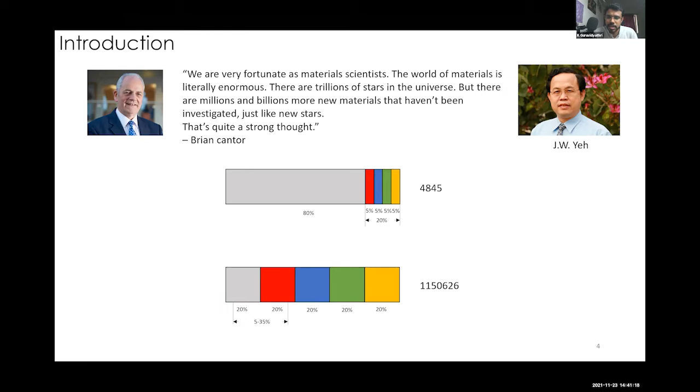So there are so many elements which are added in this equiatomic kind of ratio, which results in high entropy alloys. And the number is so high that there is a lot of excitement in the field. So people are exploring left and right all these possible alloys.

Anything related to materials, any subject related to materials, should be mapped into this materials tetrahedron, I would say. If you come across any lecture or subject related to materials, see where it lies in this materials tetrahedron. Most of you would have seen this. It basically tells us that processing is related to structure, which is related to properties, which is related to performance. And of course, all these are interconnected.

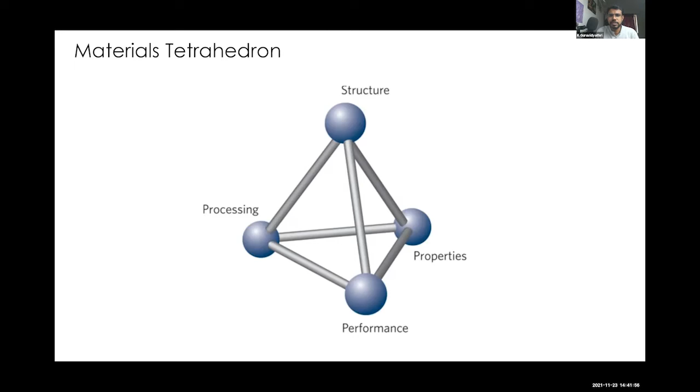An easier way to visualize this is a linearized materials tetrahedron, I would say. So I usually present this rather than the previous one. So we'll start from the left, processing.

So there is another entirely new kind of activity, which is choosing a composition, and only then we go for processing. Since the materials tetrahedron generally starts with processing, I would put the composition selection in the first part itself. So processing starts with choosing a composition, and then you go for any manufacturing process: casting, forming, heat treatment, welding, and so on. What all these are going to result in is a certain microstructure for the material.

And in microstructure, there are things like phases, grains, morphology of phases, etc. We will see about that with pictures so that you will have some more concrete pictorial imagination to assist your understanding. Then this microstructure is the one which controls the properties. Most mechanical engineers bother about composition, manufacturing process, and properties. The in-between thing, which is the microstructure, is where metallurgists come into the picture.

So understanding the microstructure, how it relates to the previous step, the processing step, and to the property step. You tailor the microstructure, you are able to tailor the properties. That's the power of understanding microstructures. There are certain things which we will talk about in detail: first, choosing composition in the processing part; in the microstructure part, the phases; in the properties part, the first four properties: strength, hardness, ductility, toughness. And then these properties enable the application.

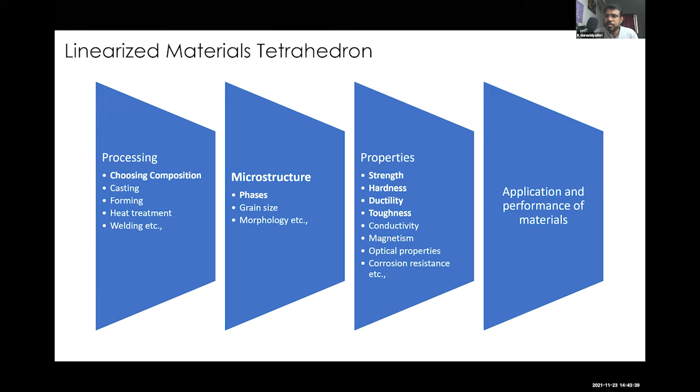So the contents of the talk are going to be like this. I will fit whatever I'm going to talk about into this materials tetrahedron. First we'll talk about composition. As I showed in the first slide itself, it's basically trying to find out which composition of high entropy alloy is good. That is the hunt for better and better high entropy alloys based on composition selection. So that is the most critical part.

Then phases. In the microstructure, we will talk about phases, especially two phases: one is solid solution, the other one is intermetallics. And in the properties, we will talk about two properties: strength and ductility. Most of you know that these two are opposite to each other. And for strength, we are talking about yield strength as well as ultimate tensile strength.

Mechanical engineers, when you study strength of materials, mostly you stick to the elastic limit, and you talk more about moduli, bending moments, all those things, where you talk about structures but don't really talk about stresses beyond the yield point. But the concern, when it comes to materials design, is strength and ductility in terms of plasticity. That plasticity is opposite to strength. If strength is high, ductility is low. This kind of thumb rule you might have heard.

So the holy grail of most structural materials or mechanical behavior related materials development studies is this: how to increase strength without compromising ductility, or how to increase ductility without compromising strength. So we will also try to see how this hunt gave rise to high entropy alloys.

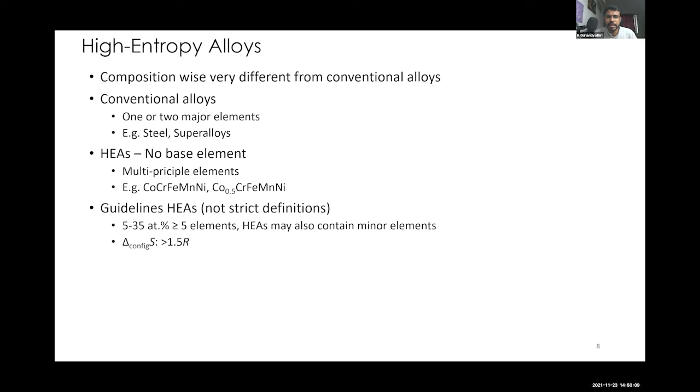And then this delta S configuration. This is one thermodynamic property; we will talk about that in detail. That property value should be more than 1.5 R. This is another definition, kind of, for high entropy alloys. Then generally speaking, these are equiatomic or near equiatomic alloys: all elements are equal in amounts, basically. And these are concentrated. I said the minimum is 5%. That means it's not a dilute solution; all the elements are in quite concentrated amounts.

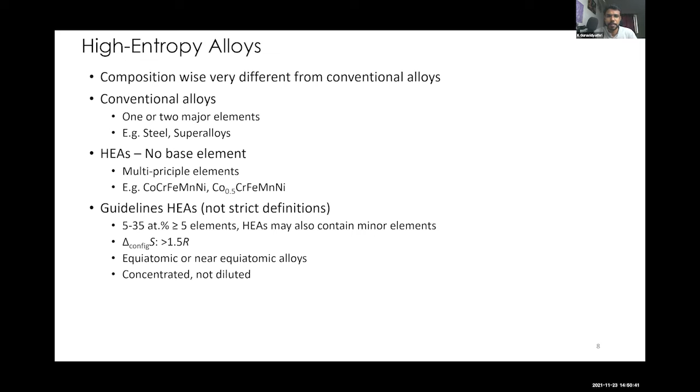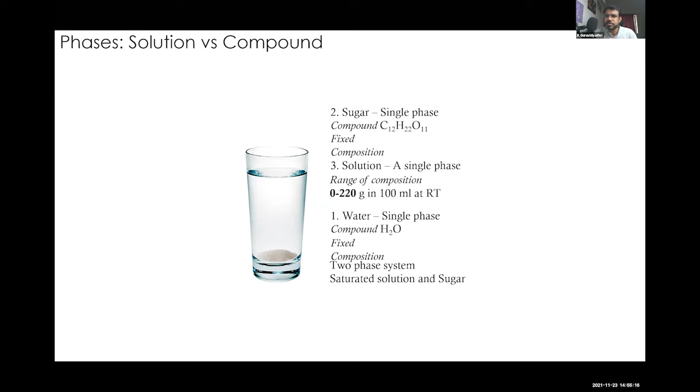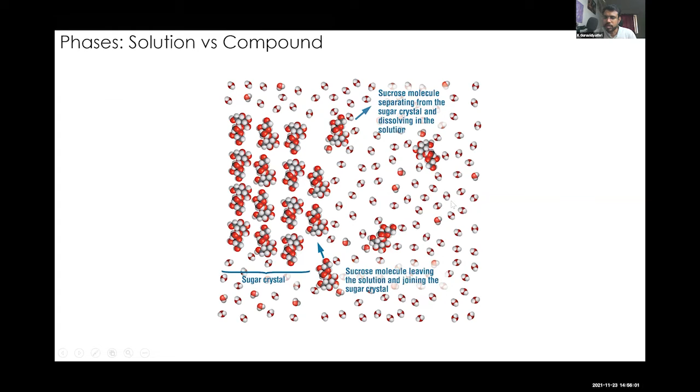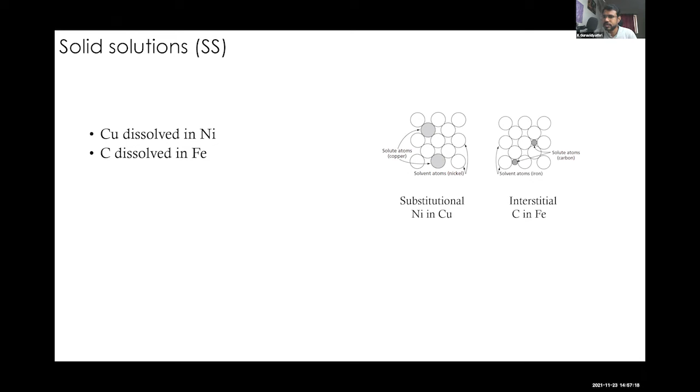Look at this one. So here solvent atoms are iron, these white atoms, and solute atoms are these black ones, which are carbon. Okay, so they are sitting in the gaps between the iron atoms, so they don't really replace the iron atom and sit. So this is called as carbon dissolved in iron, an interstitial solid solution. Okay, so it's another difference from substitutional. Okay, so here individual solute atoms sit among the solvent atoms. So this is also atomic level dissolution. In the previous case, I said the sugar molecule remains as sugar molecule inside the water solution. But here it is individual atoms of copper and nickel. Okay.

So please wait for a moment. I have to connect to power.

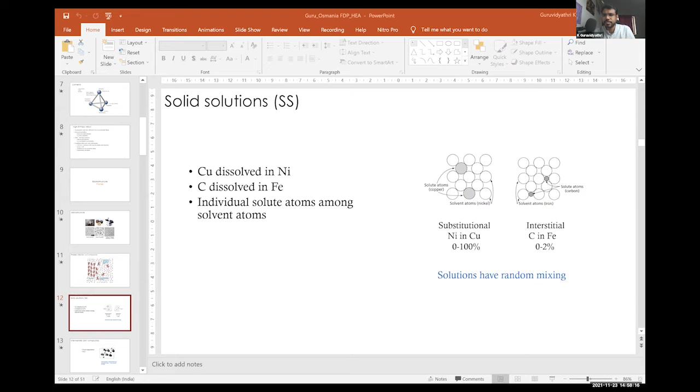Okay. So about solid solutions, we have just seen. So this is the range 0 to 100% of copper can dissolve in nickel, which means when you go to 100%, it is more like nickel is dissolved in copper. So the entire range of solubility is possible in the nickel-copper system. And in case of carbon in iron, it is up to 2%.

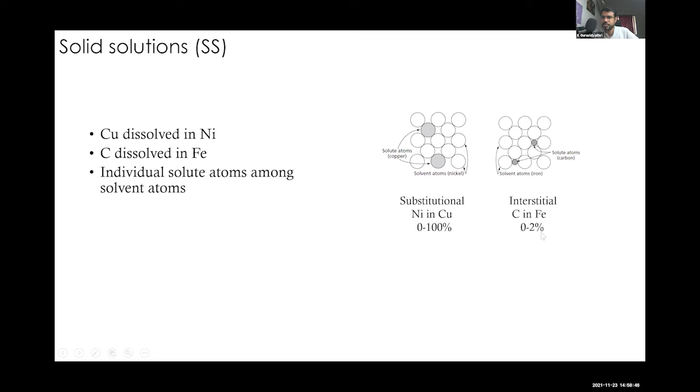And the important thing is this one, solutions have random mixing. So if you see this gray atom and white atom, they can interchange their positions and it will still be called the same solid solution.

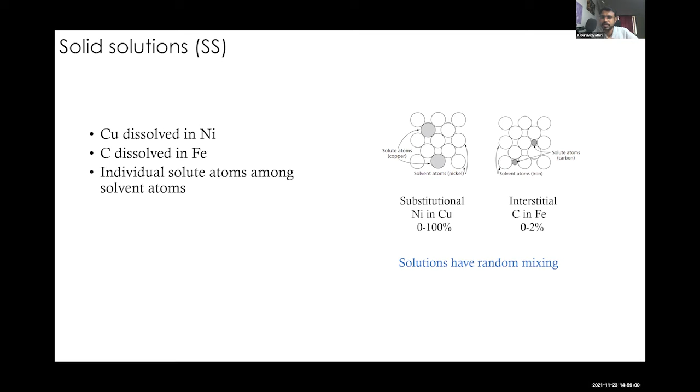When it comes to compounds, we will use the word intermetallic compounds for compounds in these kinds of metals and alloys. When we talked about sugar or water, we don't use this word intermetallic compound as there is no metallic element involved there. Here in metals and alloys, we'll use the word intermetallic compound. Conceptually, you can keep the idea of compound in your mind, which has fixed composition and all.

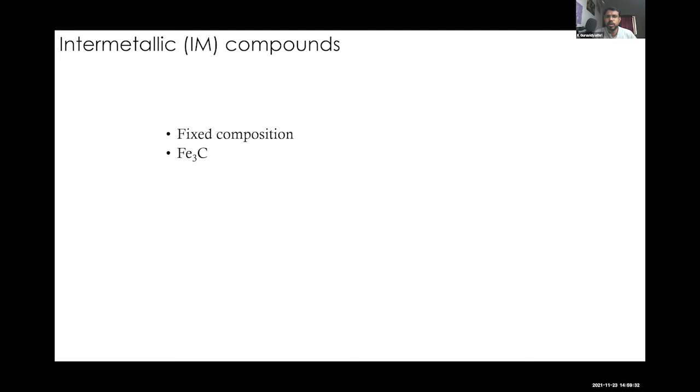The big atom cannot come to the small atom's position and the small atom cannot go to the big atom's position. If it happens, it will not remain as Fe3C. This crystal structure has to be maintained with this particular position for this particular atom. So this is another important thing about intermetallic compounds.

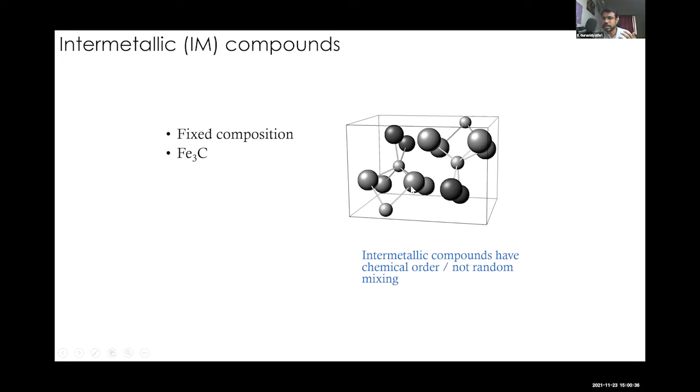So why are we learning about this solid solution being random and these compounds being very strict in their stoichiometry and crystal structure? It has to do something with the properties. We will see that in the next slide. So here there is a chemical order and the mixing is not random. Chemical order is basically carbon is one chemical element, iron is one chemical element. Since they have a particular position and cannot interchange with each other, it is called chemical order.

So we will understand something about properties, strength and ductility, and then connect it to whatever we have understood just now about solid solutions and intermetallics. So strength versus ductility. Strength is always versus ductility; as strength increases, ductility goes down. We would like to have both uncompromised when we try to design a new alloy.

When you give a stress and materials change their shape permanently, plastic deformation, what happens inside is something called slip. It's called dislocation slip, which is nothing but movement of something called a dislocation. If that happens, only then the material deforms. So we'll see what that is.

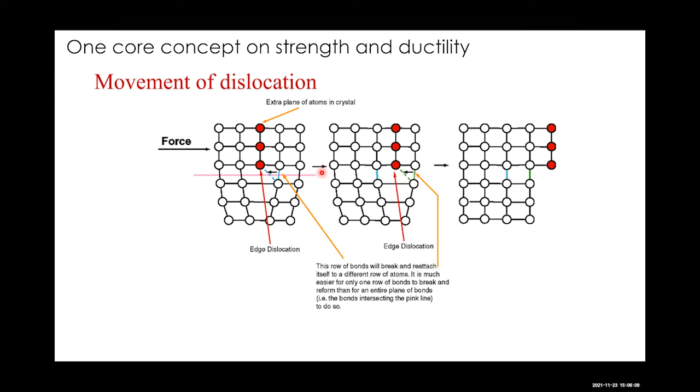This is permanent movement. So on the macroscopic scale, if multiple dislocations move like this, you will see deformation happening. So this is the deformation mechanism. Whatever I told is written in words here. So this is the crux. Easier the dislocation motion, higher is the ductility, meaning the ability to undergo shape change. Tougher the dislocation motion, strength is higher, meaning you are reducing the ductility and the material is getting stronger. So that's the opposite effect.

When we talk about strengthening mechanisms, there are multiple ways in which people try to strengthen a material, which is in principle reducing the ductility. So people try to do all shape changing in a ductile state, and then if they want to put it in the application, they want to make it stronger. For that reason, they go for strengthening mechanisms. Different ways are there to strengthen a material. All those strengthening mechanisms rely on this effect.

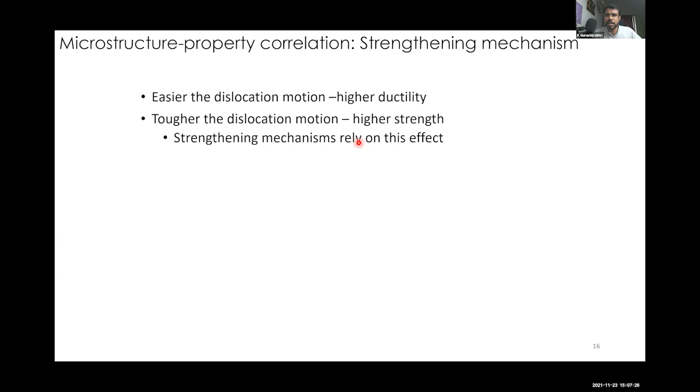Basically, they are trying to become an obstacle to dislocation motion. If that happens, the material gets stronger. Your yield strength and ultimate tensile strength will go up. So that is one way of understanding strengthening mechanisms. Fine. Now we will connect these two ideas that we have just understood: correlation between phases and strength versus ductility.

So this is, I would say, a rudimentary generalization, because this is not always true for some cases. There are exceptions to whatever I'm saying now, but roughly we can generalize. Intermetallic phases have high strength and hardness. Solid solutions have high ductility and toughness. Okay, so this is a very crude generalization.

So how to achieve a higher strength-ductility combination? We want higher strength and higher ductility together. What to do? You may think, why don't we mix solid solution and intermetallic together so that we get good ductility and good strength. True, that is called precipitation strengthening. It is one of the strengthening mechanisms which is quite frequently used. For example, nickel-based superalloys use one solid solution as matrix and one intermetallic phase as the precipitate. It gives a very good strength-ductility combination.

Okay, but this same property hunt is there in any alloy design. Even for high entropy alloys, we will keep that in mind. What about this mechanism? Solid solutions with more elements give higher strength. We can think about this also, right? I said solid solutions will have high ductility and toughness, poor strength and hardness. How to increase the strength of a solid solution?

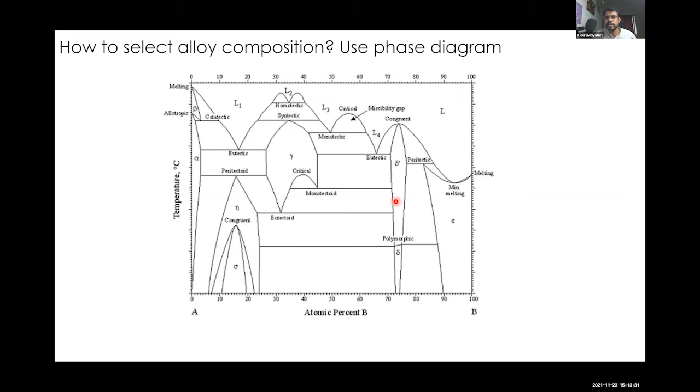You have this sigma phase, delta phase, which are basically intermetallic compounds. So there can be many intermetallic compounds. There need not be one single solid solution at low temperature. There can be multiple phases at low temperature. Okay, so this is how some real phase diagrams look, although for one or two systems you may have a phase diagram like this. Okay.

So this is the problem. Almost no phase diagrams are available for high entropy alloys. So which five elements to add to achieve a solid solution is still a big problem now. So what to do? We can rely on something like this. So this is the phase diagram AB.

This phase diagram can be experimentally made. People can actually take a mixture of A and B elements, go to very high temperature and see whether they are in one single liquid state. If yes, you mark that as liquid, and you can keep reducing the temperature and see where that liquid starts to become solid, and you can also mark a temperature where the entire thing becomes solid, and below that it is going to be only solid.

So like that, at different compositions, one can take different alloys and do this thermal analysis, heating and cooling, figure out these boundaries and make a phase diagram. So that is an experimental phase diagram. There are multiple techniques to arrive at an experimental phase diagram. Characterization techniques like X-ray diffraction are used to make phase diagrams. So there are different ways.

So that is experimental. What is the thermodynamic basis? What is the basis to understand this diagram? Why is this in this particular shape? Experimentally, yes, liquid is stable beyond this temperature, solid is stable below this temperature, all that is clear. But what is the reason? How to understand this scientifically? Which science can help us?

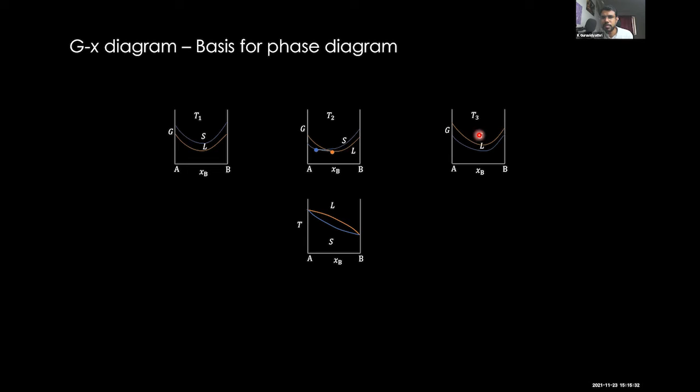That science is thermodynamics. So thermodynamics forms the basis for phase diagrams, especially something called a G-x diagram, Gibbs energy versus composition diagrams. What I've done is at different temperatures, I have drawn these Gibbs energy versus composition diagrams, and based on that, we can understand this phase diagram. Let me show you one by one.

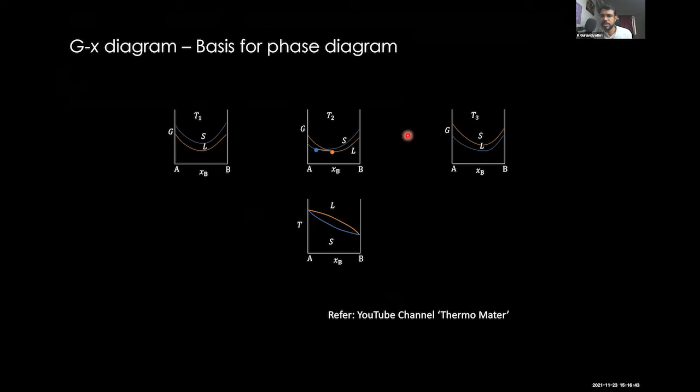So this Gibbs energy, as of now, you take it as a property for a phase. What is a phase? You have understood now. For each phase, there can be one Gibbs energy. Depending on the composition and temperature, it will change. So these Gibbs energies we can plot and they will form the basis for the phase diagram. Let me show you how. Look at this diagram. This is drawn at one temperature, T1. So you have one blue line, solid, and orange line, liquid.

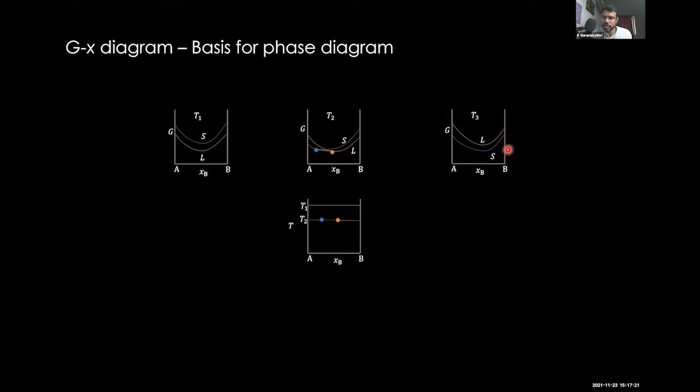So this thing gives you where the solid is stable, where the liquid is stable, that kind of details. T1, T2, T3 are three different temperatures. You will see that liquid is the lowest in some cases, solid is the lowest in some cases. Whichever has the lowest Gibbs energy, that will be the stable phase. So therefore, you can mark it in the phase diagram and get the entire phase diagram depending on different temperatures. So this is how a phase diagram comes from Gibbs energy.

So now we have understood that there are almost no phase diagrams available for this thing. So we can look at the Gibbs energy of the solid solution and try to minimize this. Therefore, the intermetallic phase will not be stable. So how to minimize the Gibbs energy of the solid is what we are going to see. So how to reduce the Gibbs energy of the solid solution more. For that, we have to understand Gibbs energy better. So Gibbs energy for a solid solution has this kind of expression.

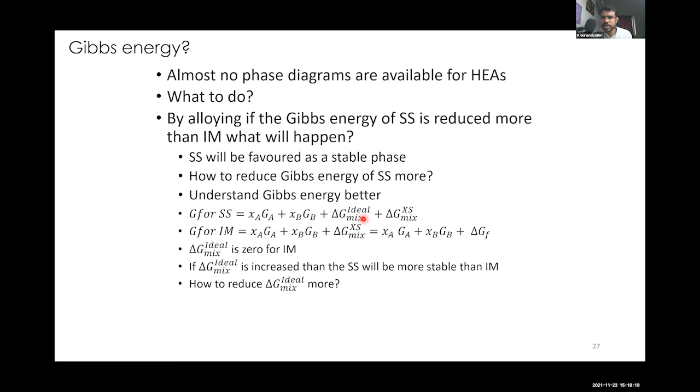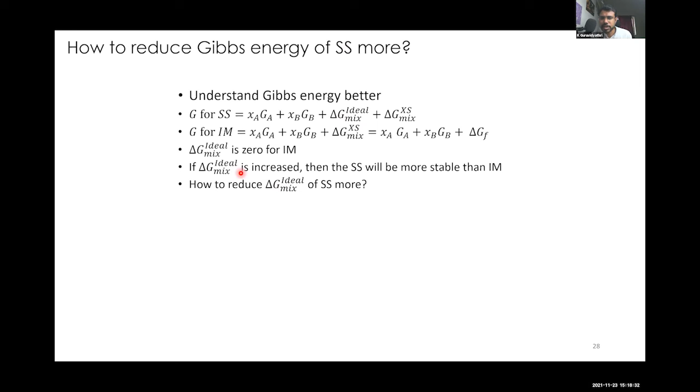Gibbs energy for intermetallic phase has this kind of expression. So here this delta G mix ideal is there for solid solution, which is one extra term which is missing in the case of intermetallic phase. So what is this delta G mix? It is basically nothing but something called as configurational entropy. So this configurational entropy we should try to increase. Therefore, we can decrease the Gibbs energy for solid solution.

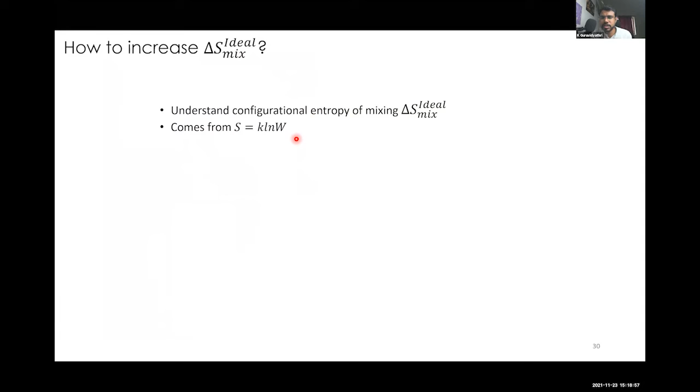So here you can see T delta S mix ideal. That is the configurational entropy of mixing. If that is increased, we can stabilize the solid solution. So that's the idea of stabilizing a solid solution. It comes from this equation. I have one quote about this. We can skip it for now. So this equation is written in Boltzmann's tomb.

So this is the way to increase the configurational entropy. If we try to have more number of atoms, configurational entropy increases. That is why Gibbs energy of solid solution goes down. So this is how we design high entropy alloy. So this W is the one. S equals k ln W. This S is nothing but our configurational entropy of mixing. So if we want to increase that, we have to increase the W.

So I guess my watch is showing some other time. I don't know. It's 3:20 now. Sorry, I'm a bit carried away thinking that it is 3:30. I started skipping something. We have time, half an hour more at least.

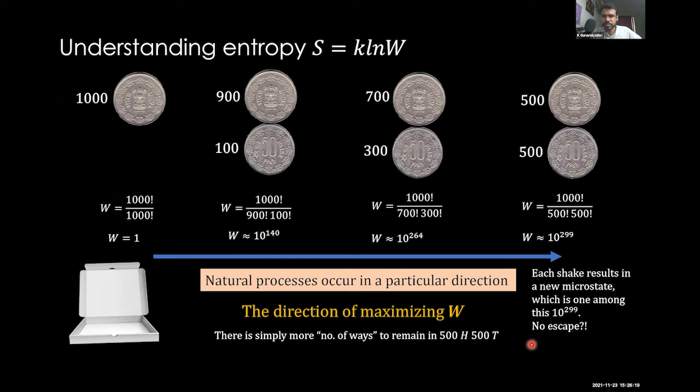So natural processes occur in this particular direction. So why are we understanding this now? We know that when W increases, entropy is increasing. Keep that in mind; that is going to be useful to design high entropy alloys. Natural processes occur in the direction of maximizing W. Why we are bothered about natural processes is, whatever has higher W will be more stable in nature. It will not try to go back to any other state. This state has the higher W, so this state will be more stable compared to the initial state. Yes. There are simply more ways to remain in the 500 heads and 500 tails case.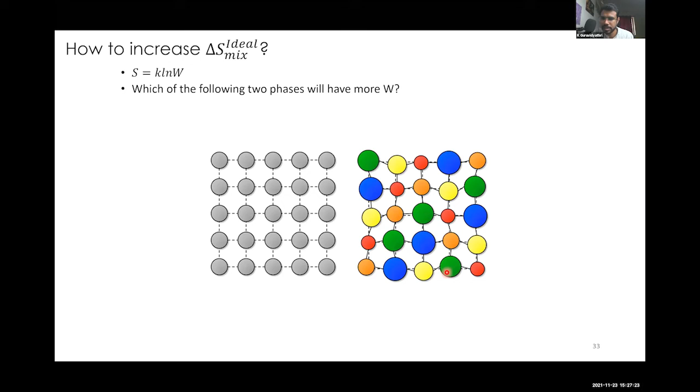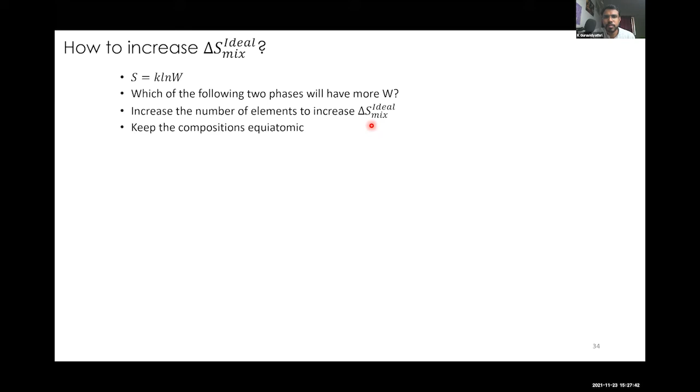If entropy increases, Gibbs energy is going to go down because Gibbs energy is H minus TS. That minus TS term will be very highly negative, therefore G will go down. If G goes down, the solid solution will be more stable. Whichever has the lowest Gibbs energy is the most stable. So how to increase this delta S ideal mixing is by increasing the number of elements. Increase the number of elements to increase the delta S. And keep the compositions equiatomic. This is another piece of information.

Add multiple elements in concentrated amount or equal amount. Increase the configurational entropy of mixing of solid solution. Decrease the Gibbs energy of solid solution. Then stabilize the solid solution. Therefore, your strength ductility combination is better. So all this is fine. So this is the hypothesis.

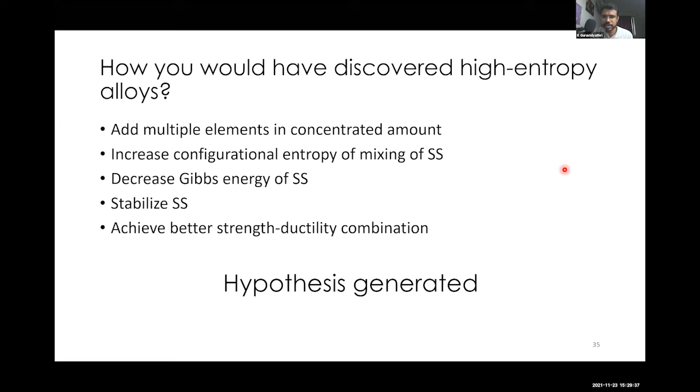In all these cases, we are still talking about the science of thermodynamics and how can it be useful to stabilize a solid solution. Can it really get stabilized only by increasing the configurational entropy? That is another question. So this is our hypothesis. Let's see what has happened when this hypothesis was tested for almost the last 2 decades.

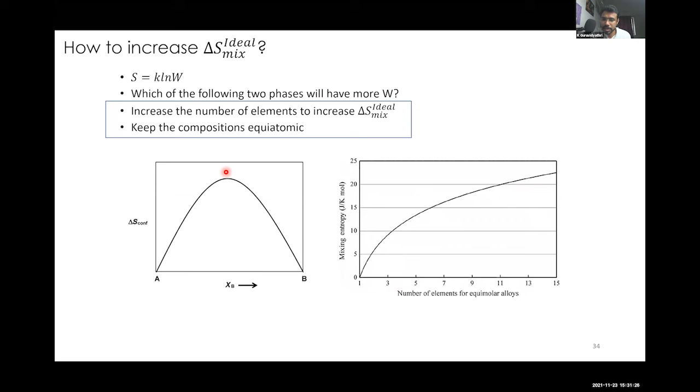So stabilizing single phase solid solution by increasing the configurational entropy is not working irrespective of which 5 elements, 6 elements we choose. It depends on what elements we choose. In the previous slide, I showed only number of elements. Here, I'm telling about equiatomic ratio of 2 elements, not which 2 elements. So depending on which element we choose, is it copper, nickel, cobalt, iron, manganese, there are some differences coming.

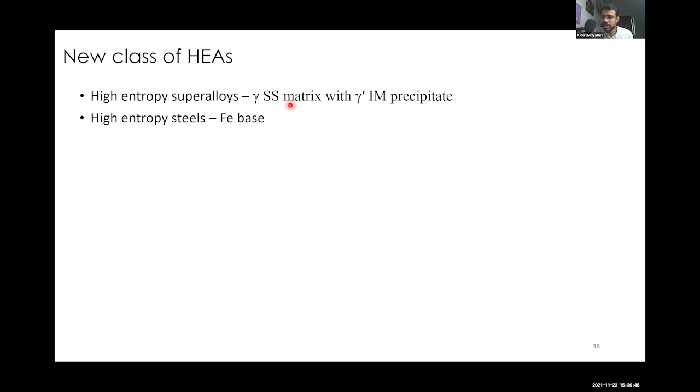Then eutectic high entropy alloys. Eutectic is one of the reactions in the complex phase diagram that I showed. What it gives is two phases. In the two phases, there is a particular way in which they arrange themselves. That arrangement gives very good properties. Both strength and ductility are very good for that kind of microstructure.

Since that is the result of something called a eutectic reaction, people tried to see whether in high entropy alloys there are any eutectic reactions happening, and whether any microstructure looks like this kind of signature for eutectic reaction. And they did find, and then they called these alloys eutectic high entropy alloys. Again, property wise that is very good.

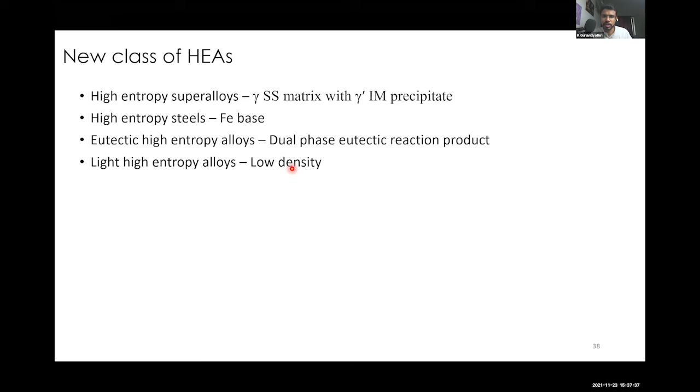Then light high entropy alloys, which have low density. Low density is always a hunt. As mechanical engineers, you know, if you want to increase the fuel efficiency of your vehicles, you have to reduce the density of your components. So light high entropy alloys are in that direction.

Refractory high entropy alloys are for high temperature applications. The refractory elements, high melting elements like tungsten, molybdenum, vanadium, are taken and mixed together to form high entropy alloys. So these are refractory high entropy alloys.

Then immiscible high entropy alloys. This is a term which I proposed and I am working on. Here, this is again a thermodynamics based phenomenon where we do not get a single solid solution. Inside the solid solution, we will get some clusters, or we will get two solid solutions forming due to some kind of behavior of Gibbs energy. I'm not explaining that behavior right now.

Okay, so that is a very interesting phenomenon that happens in high entropy alloys. These clusters are two phases which are forming due to this phenomenon called phase separation. They give very high strength, something called cluster strengthening. So in that way, this class of alloys also becomes important. These are immiscible high entropy alloys.

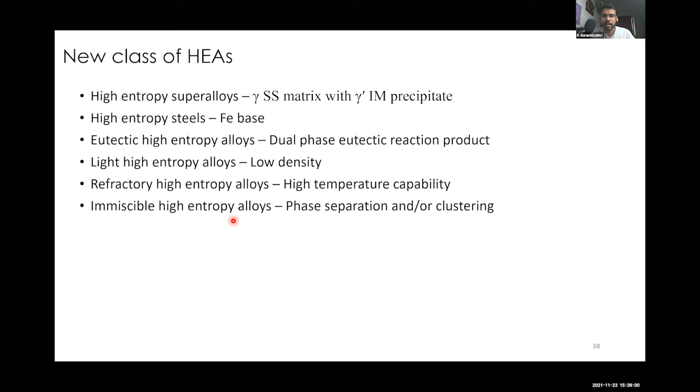So now you can imagine, from the intention of making single phase solid solution, how diverted and expanded the field is. So these are the different classes of high entropy alloys. Yeah, this is obvious.

So now the question comes, how to select the high entropy alloy composition. Now that we know it is not going to form solid solution all the time, if we are intending to have a certain microstructure, what is the rule, what is the source where we have to go and figure out this selection criteria? For that there are some simple methods. I already told phase diagrams are not available, so people resorted to some simple methods which are empirical rules and binary phase diagram inspections. We'll talk about that empirical rule also.

And there is a robust method which is called CALPHAD, calculation of phase diagrams. So this is a kind of weird acronym for that. Here Gibbs energy descriptions are used, meaning the different Gibbs energy curves that I showed, from which we can draw a phase diagram. The equations for those lines are the Gibbs energy descriptions. People have figured out these Gibbs energy descriptions.

That is the work of people working in this area, CALPHAD. They generate these Gibbs energy descriptions for various phases. From the competition among these Gibbs energies, you can get your phase diagram. So the phase diagram is something that appeals to you, but how to get the phase diagram from theoretical means is what CALPHAD researchers do.

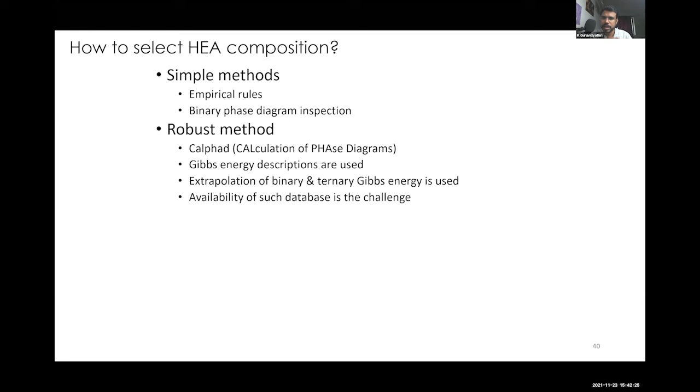So the problem here is whether we have all the binary and ternary Gibbs energies assessed already. If they are present, then we can make a database, and using that database, we can calculate a phase diagram, even for a 5 element system. But what if those are not available? That is the challenge in this area, and the databases are being continuously improved.

That is the idea. Hume-Rothery empirically figured out that if atoms have close atomic radii, they can form a single solid solution. That was done for binary and ternary solid solutions. But here, this is done for a 5 component system also. So it's a broad guideline again. It is not a very strict parameter. Even if it is obeyed, we still see cases where a single solid solution is not formed.

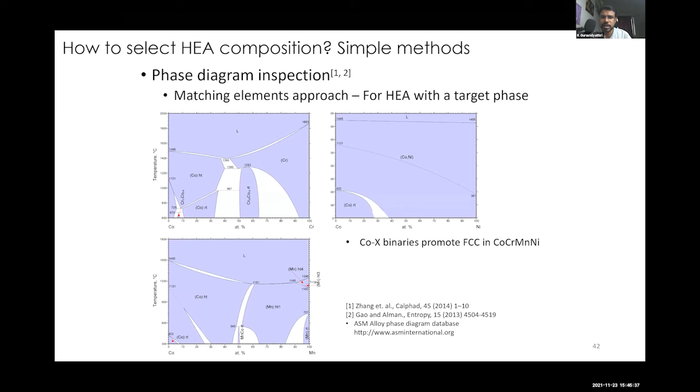So these binaries, what do they say? Do they show one single solid solution for a big range? If yes, let's take only those binaries and mix those elements together. Therefore, in the high entropy alloy also, we'll get that same single phase. So this is one kind of simple method, which again has its own drawbacks. I'm not talking about the drawbacks now.

The robust method is CALPHAD, which is my research area. It's the direct method for phase diagram making. So the conditions we have to give, like composition, temperature, pressure, things like that. Then we can do something called Gibbs energy minimization. Whichever phase or combination of phases has the lowest Gibbs energy, those will be the stable phases.

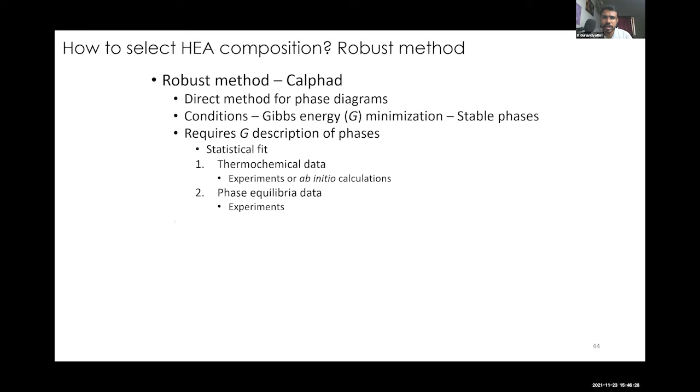So there is no question of increasing the configurational entropy and stabilizing only solid solutions, because even intermetallic phases can have a certain increase in configurational entropy. So it's not a simple thing. Gibbs energy is the only parameter we should rely on, which takes into account enthalpy also, not only configurational entropy. So this is the entire procedure of what happens in CALPHAD. I will skip it for now. Some results I will show you, because this is important.

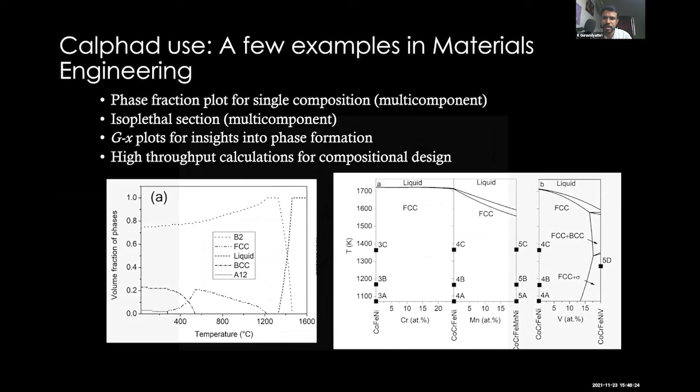So I'm just saying, from the plots itself, without going for a phase diagram, you can get some idea about what your high entropy alloy microstructure will be. But the plots are only for binaries. So this is a very interesting thing. If you have only binary Gibbs energy data, that is good enough.

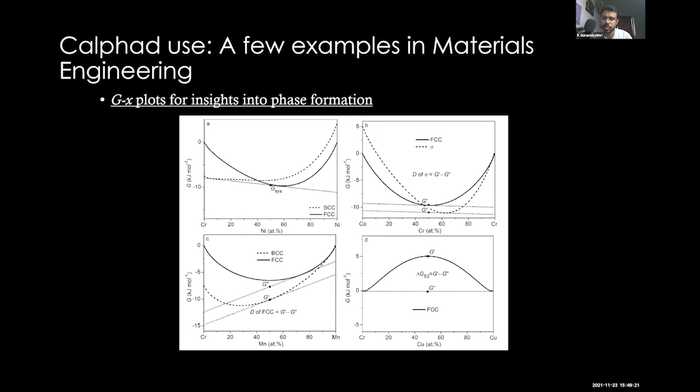You don't need to use a CALPHAD software like Thermo-Calc and bother. Only get these Gibbs energy descriptions, use your Excel or something. Then you can figure out these diagrams and different quantities that are mentioned here, like D. Then you can say how easy or difficult it is to stabilize one phase in your microstructure. Fine. These are a little more applications.

I think I will stop. 10 minutes are there. I will leave it for questions. Okay. So the promising properties I will show and finish.

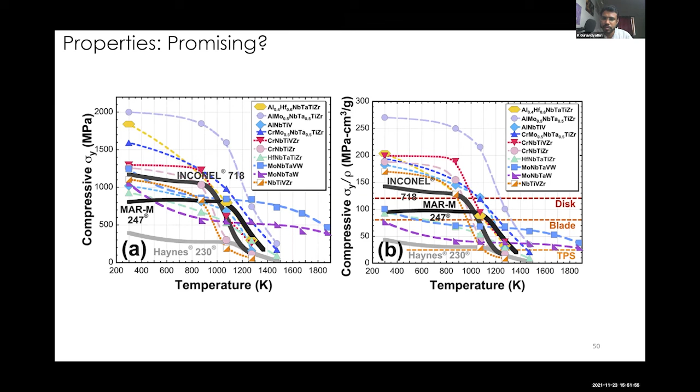So like this, there is a huge hope in the field, and as I told, there are millions of alloys to be explored. So those of you who are interested to delve into this, there is at least 2 decades of literature available, and a few books are available. At least 150 review papers are available, so you can start with that.

So I will finish with this quote from Carl Sagan: somewhere something incredible is waiting to be known. He said this about finding intelligent life somewhere in the galaxy. So I think this is suitable for high entropy alloys also. Thank you.